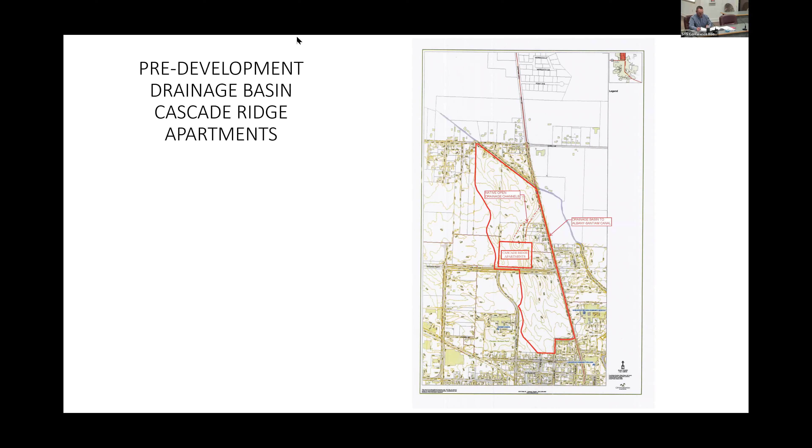My opinion is that is very legit. We're in the same basin. We're just introducing it at a slightly different point of a public system in a public right of way. So there's a legal right to do that.

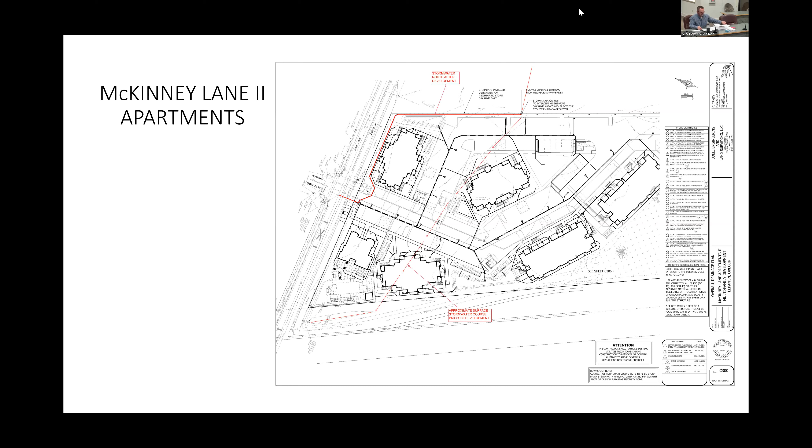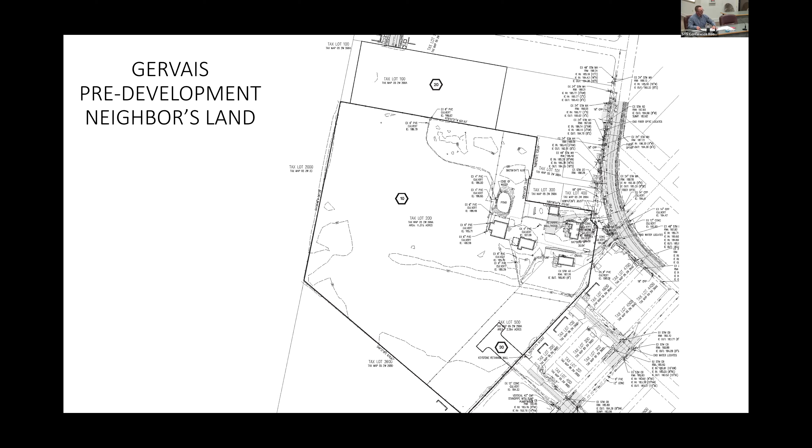And the developer, this is my opinion, I think he's got a little bit of history here with lot 20, and he didn't end up owning it, so he doesn't want to cooperate. So we went ahead, we prepared our tentative plat for our development, our site plan review. We showed we were going to discharge just shy of the property line in a ditch, and it would find its way to the basin on the neighbor's property. And we explained how we were following the natural or historic drainage pattern.

And we also provided a copy of the old report showing that the pipe was installed of adequate size. And the city came back and told us our application was incomplete because we didn't have a legal easement to use that storm system. So we're kind of stuck in a pickle. They're telling us to go east.

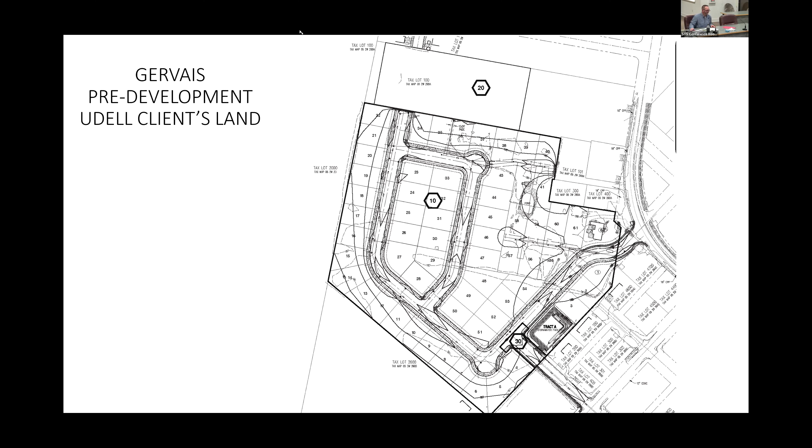Thanks, we appreciate it. All right. You're welcome. I appreciate you guys taking the time to listen and not beating me up too bad. Thank you, Brian. Do you get paid for this? She offered, I said no. Well, Brian, I know it was your first time doing a presentation like this, and you did great, and it's greatly appreciated. And you're kind of an expert in this, especially in our city specifically. And so it's been wonderful to have you here. And I'll buy you a beer or something like that as payment. Super. This is being recorded, so I'll hold you to that.

Thanks, Kelly. So we do have, looks like 12 minutes before the next meeting starts. As this is my first experience in one of these meetings with you all in the room and me not there, I just want to remind everybody to make sure that your microphones are turned on, and if you are going to speak, speak into the microphone so that it's caught on audio, so that we all can hear you that are sitting here from home, mainly me and maybe Trey. Can you hear me okay right now, Kelly? It's a little quiet, but I can hear you better. That's because my microphone's off. There you go. I have the sign-in sheets here.

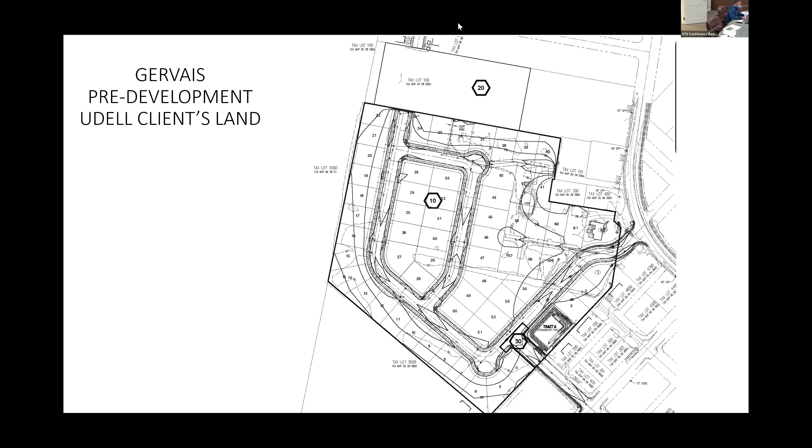Is this meeting open for people to come in tonight? Yes, for the 6 o'clock meeting, yes. Right, okay. And do you know, is there anyone that's warned you in advance that they will be speaking over the internet? We received a letter, which I emailed to all of the planning commissioners yesterday, where they indicated that there might be some members of the neighborhood coming tonight, but the author of the letter would not be in attendance. And so are you holding the sign-in sheets for today? Yes. We'll want to put those by the door, in case somebody wants to come and sign in.

All right, welcome to the Planning Commission meeting for February 16th, 2022. We're going to open the meeting and call it to order with a flag salute. I pledge allegiance to the flag of the United States of America, and to the republic for which it stands, one nation, under God, indivisible, with liberty and justice for all. Roll call. Yes, sir. Commissioner Brashears? Here. Commissioner Garrett Kunerowski? Here. Commissioner Munn? Here. Commissioner Prenovo? Here. Commissioner McLean? Here. Vice Chair Robertson is excused, and Chairman Salvage. Here.

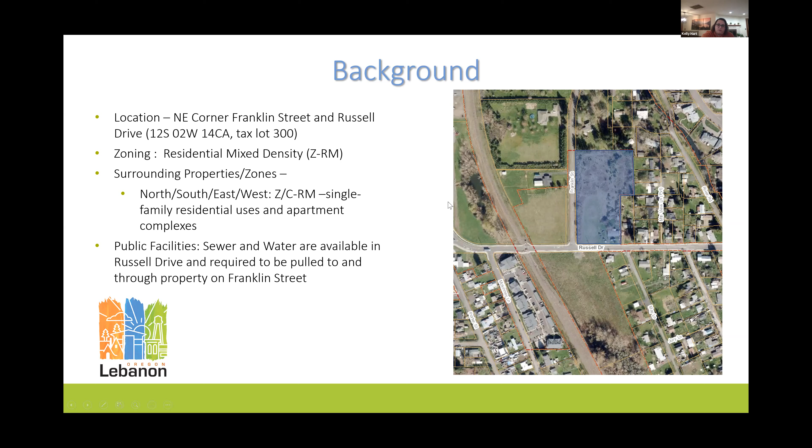That's correct, yes. The property to the north is similar in terms of width, so that road would be able to extend to the north and connect further. And although there's no plans for that and it's not necessarily a requirement, it would provide for that internal access rather than access on Franklin Street for any future development to the north.

Second question is property sizes. Is the net square feet accounting for any setbacks on each of the lots? Is that the way I would understand that? The net square feet removes any access easement requirements, and that's how the code requires it. You look at gross square footage in terms of setbacks and you look at property lines in terms of setbacks, but the net square feet is just in terms of removing any specific access requirements, because you can't build on it and you can't live on it. Okay, thank you.

I have a question. The road, I guess I didn't hear, was it a private road or is this going to be incorporated into the city's maintenance, into the city? Yeah, it'll be a public street. Okay, thank you. I had the same question. I know she answered that earlier, but I couldn't remember. Secondary question then, is the road wide enough? Will there be off-lot or on-street parking available for these homes?

It'll be city standard, so that it allows for, I didn't hear the road width, but they have to allow for parking at least on one side, I believe. 36-foot road. I can't remember off the top of my head what the roadway width was. It looks like it says 36 foot here, curb to curb. 56 from outside to the sidewalks. So that's our standard out of our TSP, which I assumed that it would be. So on a 36, you would be able to have parking on both sides, it looks like.

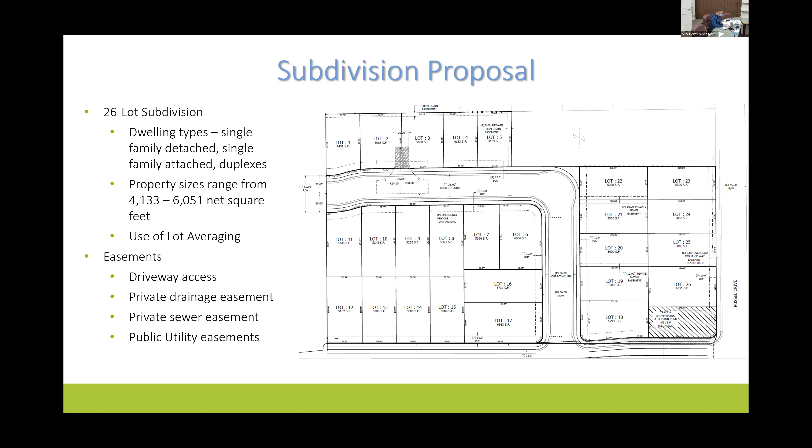Any more questions for staff? All right, I'll invite the applicant or their representative to come forward and speak. All right, good evening again. Brian Vendetta, Udell Engineering, 63 East Ash Street in Lebanon, Oregon. So again, I'll commend Kelly on her very detailed staff report. I think she hit the high notes. I'm going to just walk you through real quick.

I apologize if I duplicate what she said, but we are proposing on a roughly 4-acre parcel a 26-lot single-family subdivision, which now with the new House bill does also allow for duplexes on all lots. The streets would be built to city standard and then dedicated to the city for maintenance, which is typical of a residential subdivision. They are of a width that would allow parking on both sides. We looked at the property to the north. They're large lots within the city limits, zoned RM, and they do have development potential. So we've stubbed the street, splitting the common property line between those two large parcels, so if the owners ever decided to further divide or urbanize the properties to the current maximum potential, they could extend the street to do so.

In doing that, we've planned for and visited with the local fire marshal. We'll provide an emergency service vehicle turnaround that complies with the fire code, short of that dead end. City utilities are all available either in Russell Drive with respect to sewer, water, and storm drain, or in Franklin Street. They stop short of our north property line, so the proposal would be to extend them per city standards to the north property line, build out the balance of Franklin Street adjacent to where the apartments across the street built their half-street improvement, and develop a half-street to city standard with curb, gutter, and sidewalk on the east side along the frontage of our subdivision to our north property line.